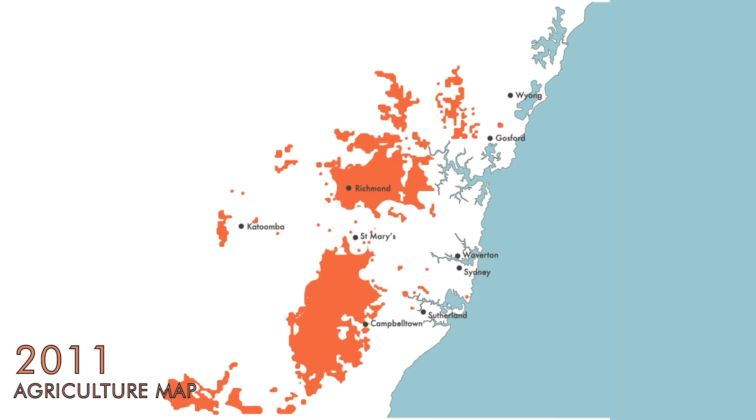Over the next 20 years, Sydney is expected to continue to grow at a rapid rate. 1.6 million new residents are expected to be living in Sydney by 2035. The growth of Sydney's outer suburbs in order to accommodate these residents poses a critical threat to Sydney's food supply. If we allow this pattern of urban sprawl to continue unchecked, Sydney faces the prospect of losing more than 90% of its current fresh vegetable production.

In a time where freak weather events which cause mass disruptions are becoming the norm, Sydney could find itself in a situation where the city only has 2 days' worth of fresh produce in stock.

We have come up with a plan for a completely self-sufficient floating suburb which can meet some of the demand for Sydney's future housing needs, thus reducing the amount of agricultural land lost. The urban homestead also offsets any lost agricultural land in the Sydney Basin by providing a space for agricultural production in inner Sydney.

Using vertical farming in order to make the most of limited space, residents of the floating suburb can grow their own fresh vegetables as well as help provide fresh produce for nearby residents.

By living in floating houses, residents' homes are more resilient and resistant to the effects of climate change such as rising sea levels. Using building techniques such as flat-pack housing, these homes can be built quickly and also adapted to accommodate any future living needs.

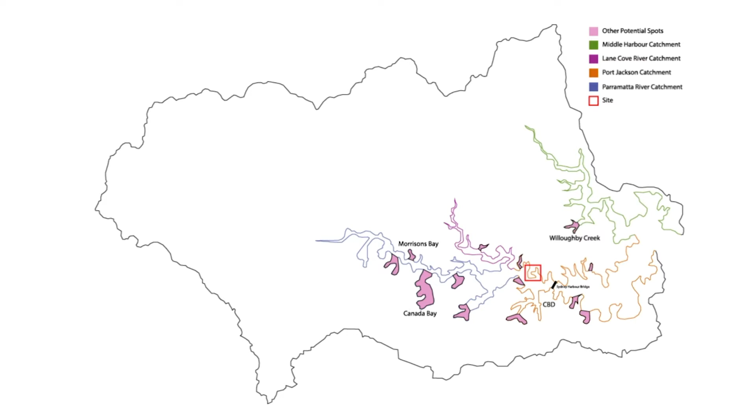It is not too populated with wharves and ferry stops as well, so the houses don't get interrupted by the busy harbour. So this is our master plan for Woodley's Cove.

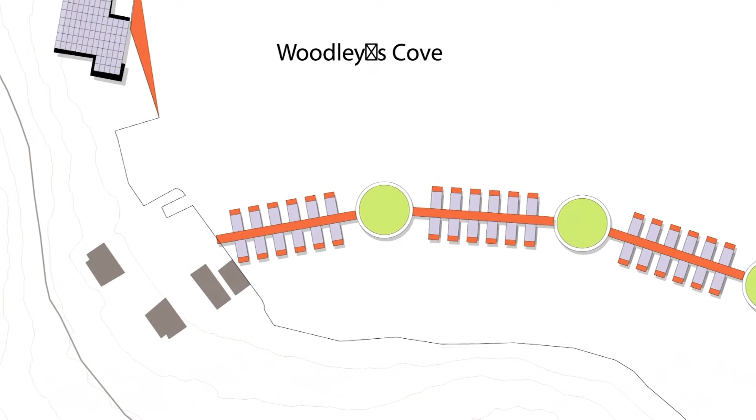It includes the floating housing in the south side of Woodley's Cove, which is 12 houses per segment leading to a green space. This green space has been implemented as a normal house would on land have a backyard. This is their backyard. There is also a greenhouse as seen on the north side of Woodley's Cove.

The greenhouse is for growing produce in which the houses can survive off, which is grown in circular vertical farms. Located to the left of the greenhouse is a water catchment which supplies the farms.

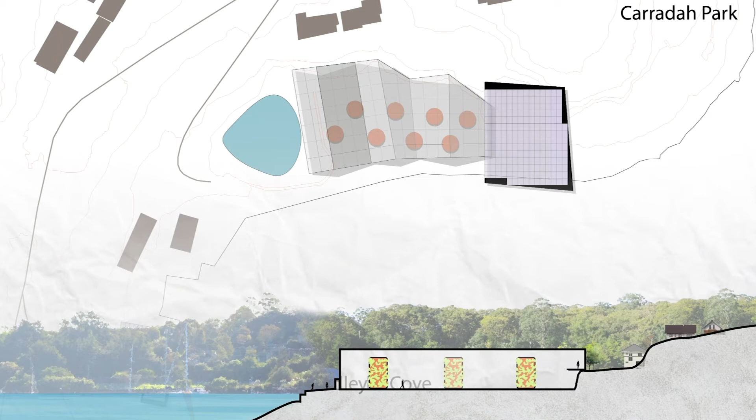And then to the right of the greenhouse includes a shelter which has solar panels on it which provides power for the houses on the water. It also provides shade and shelter in a very exposed area.

Solar panels are also located on the rooftops of the houses and also to the marketplace which is located in the middle of the Woodley's Cove.

This marketplace is where the produce from the farms is sold to outsiders and also supplied to the residents on the water. It also has a deck out the front of it.

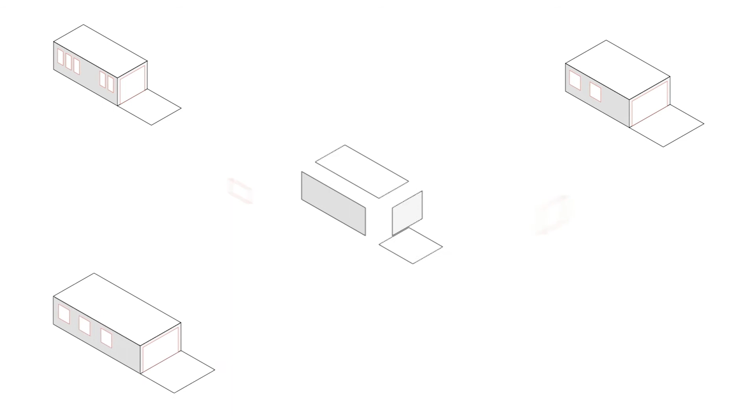The floating houses are flat pack houses designed to be simple and modular, adapting to different circumstances. This allows the residents to pick and choose the desired house that would fit their needs, and when their needs have been met, they can expand and upgrade their house.

Since the houses are located in the bay, the solar panel roof can benefit from a full day's worth of sun, allowing these houses to be off the grid.

As a result of climate change, Sydney is experiencing an increased amount of hot days. To take advantage of this, most of the buildings on the cove are fitted with solar panels, storing energy onto on-site batteries, which would later be used by the greenhouse, the market, and the floating residents.

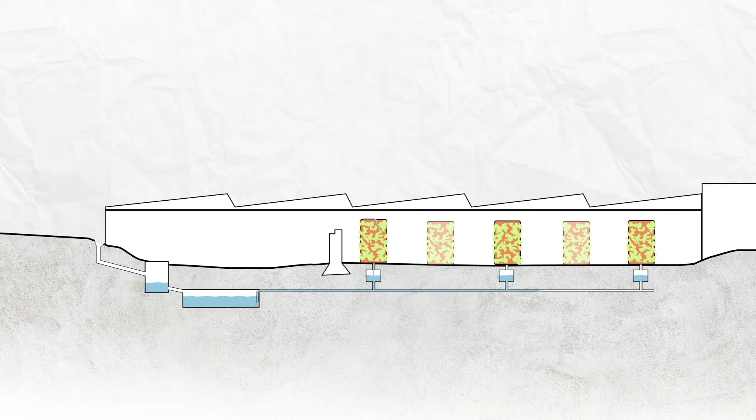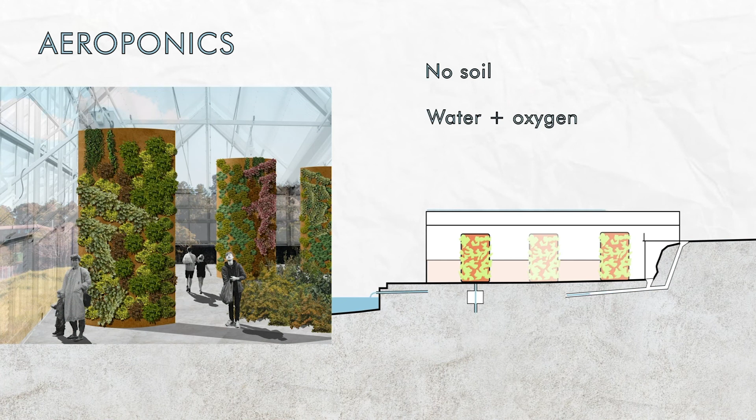In response to the increased events of heavy rain, the greenhouse has been designed to collect, filter, and store water. The water is used by vertical gardens, which utilizes aeroponics to grow its crops. Aeroponics farming doesn't require soil, only using a steady mixture of water and oxygen, allowing the plants to absorb minerals at a higher rate, accelerating the growth cycle of these plants.

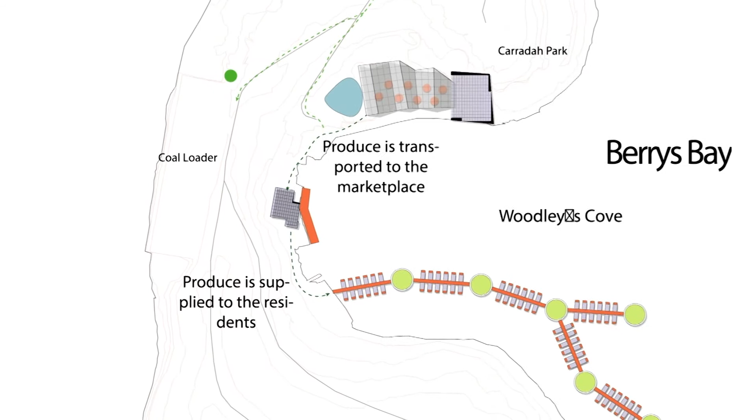This map of Berrys Bay shows our design and how the food process works within our design. So it begins by growing in the greenhouse, which then the produce is transported to the marketplace, which is then supplied to the residents, and whatever is left over is then sold to the other local grocers and cafes around the area. These cafes and grocers are shown by the green dots.

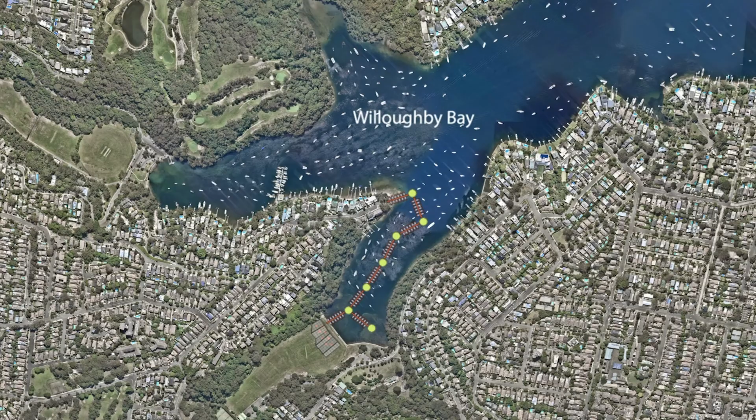Within the Sydney catchment, there are multiple locations in which our design can be implemented. One of these locations is Willoughby Bay, which is in the Middle Harbour catchment. This area was chosen for its connection to the park in which a farm can be laid onto.

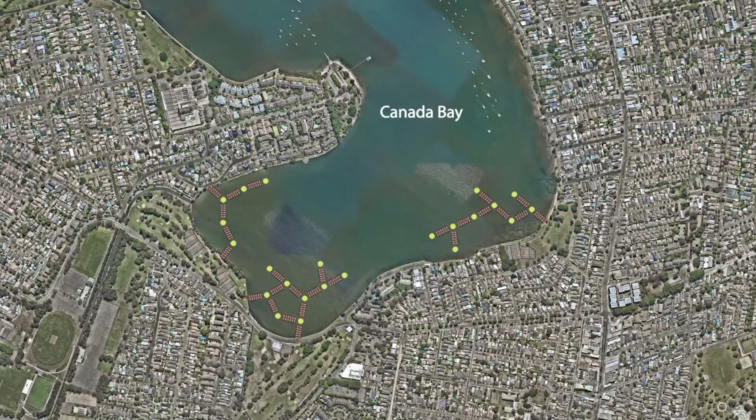Finally, Morrison's Bay, which is opposite of Canada Bay, was chosen for its skinny form in the fact that even in a skinnier, smaller bay, our design can be implemented.